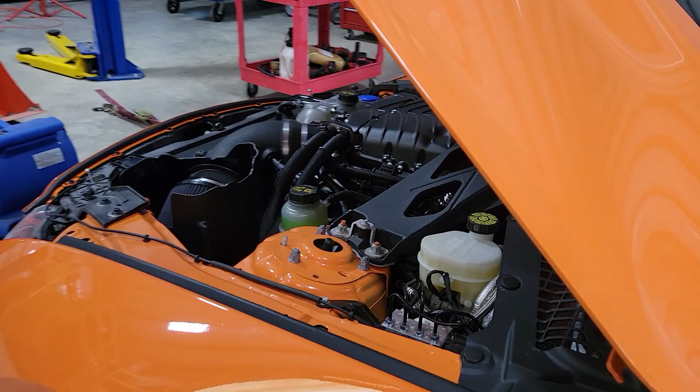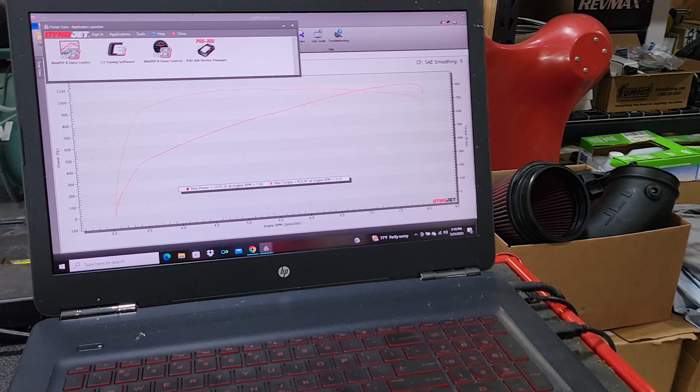Now keep in mind, guys, this car still has the factory short tube headers on it, not long tubes or big 2-inch long tube headers, so that's a little bit of restriction. We've still got the factory cat back on this car, even the stock resonators are still in place. So the exhaust system is pretty much as it is from the factory. We've got a little bit of restriction there. If this car had long tubes on it, it definitely would probably make at least 50, maybe 75 more wheel horsepower than it's making now with the exact same tune.

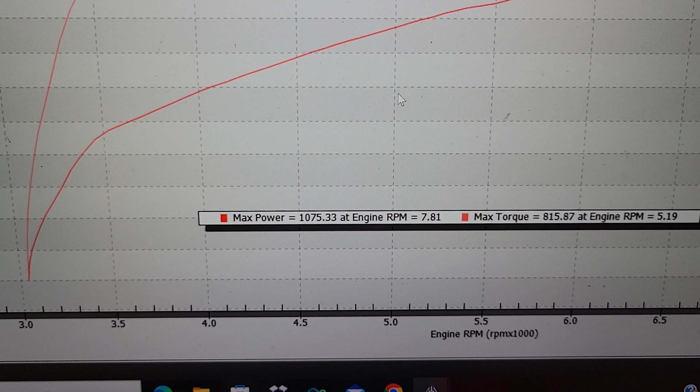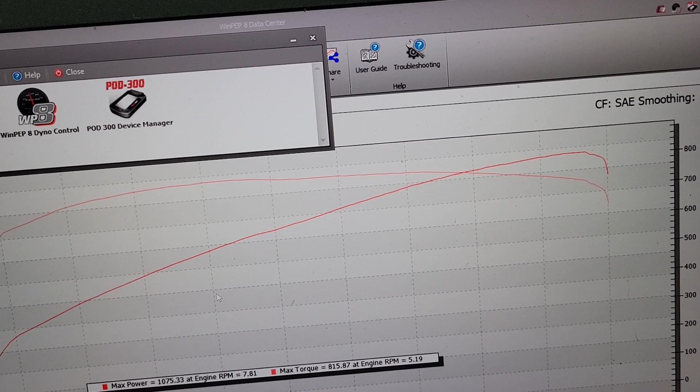So what we ended up with is 1075, 815 on E85. For you guys out there that love to pick apart dyno graphs, you see this little fall off at the top - no, the car wasn't failing. That's simply where I backed off the throttle before I hit the stop button on the dyno run. So for you Karens out there that like to pick things apart and say something's wrong, no, nothing was wrong. Car done absolutely fine.

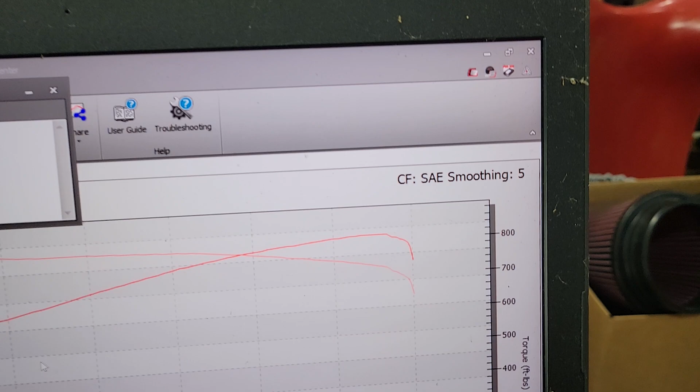Really pleased with this number. The owner's really pleased with this number. He was shooting for somewhere around 1100 wheel horsepower, and we're there. These are SAE numbers, which is probably in most cases going to be the lowest number that you'll get on a dyno readout, especially with these Dynojets.

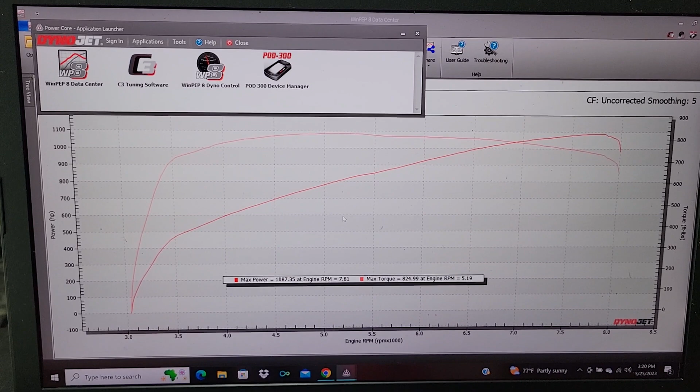I'll change this over to uncorrected, where you can see that. Uncorrected, as a reminder guys, is what the car actually made on the dyno at that particular moment in time with the present weather conditions that were there. And the car made 1087, 824.

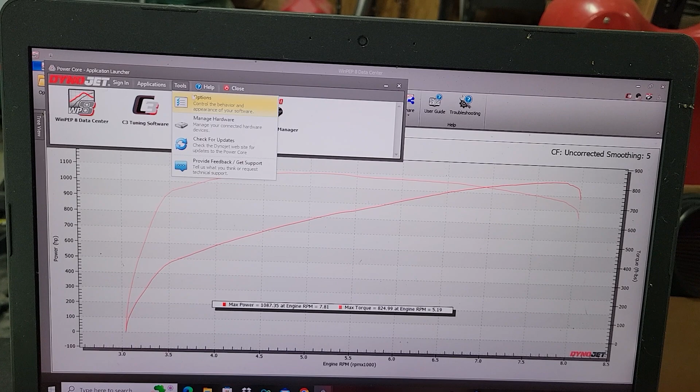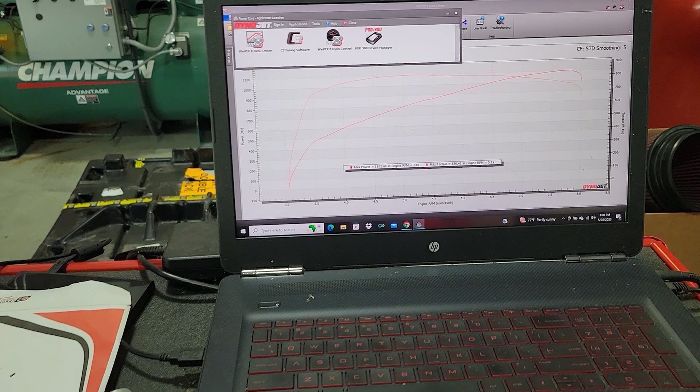And if you want to see the popular thing on the internet when it comes to dyno numbers, let's go ahead and put it in standard. Standard correction will show you 1102, 836. So guys, this is a 1100 wheel horsepower car, you basically could say.

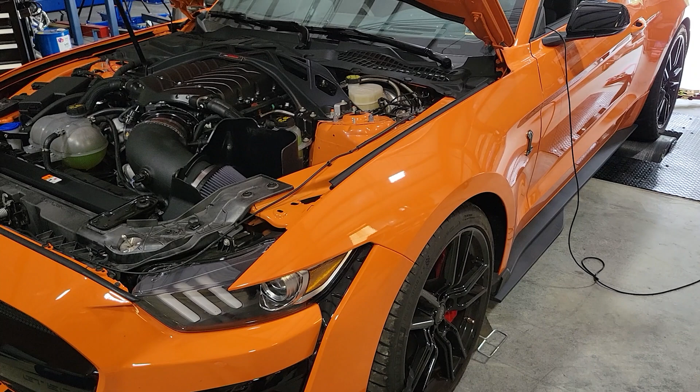That translates somewhere around 1250 to 1300 horsepower at the crankshaft. This is a very, very streetable car. With this 3.8 liter Whipple, as it comes standard from them, it is unported, just like it comes out of the box with their standard throttle body on it.

It works like butter. It is super smooth. No drivability problems. It is just what you would want in a street car. I mean, unless you go full throttle, you'd never know this car's got that kind of power, but it does, and it's a complete animal once you go WOT.